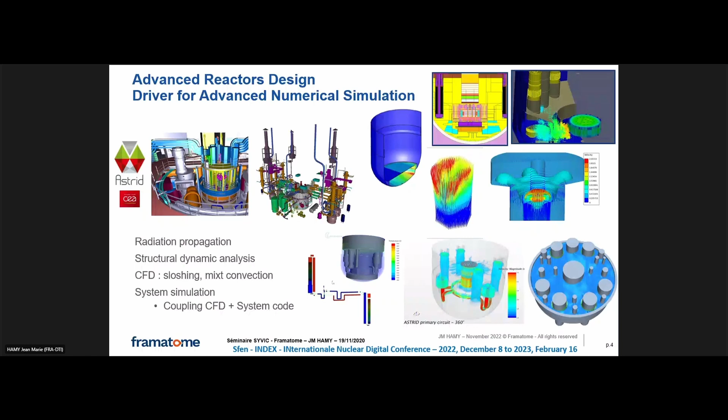So after Astrid, we developed many tools and new practices. At the end of the project, we decided to keep the momentum and create a design school to help much more globally within the company, the various projects, to address the stakes of complexity mastering we have when designing our complex systems and reactors, to also help for knowledge transfer and development of architect engineers, and also to cope with the efficiency of design sequences, and with the question of early prototyping and larger usage of advanced methods.

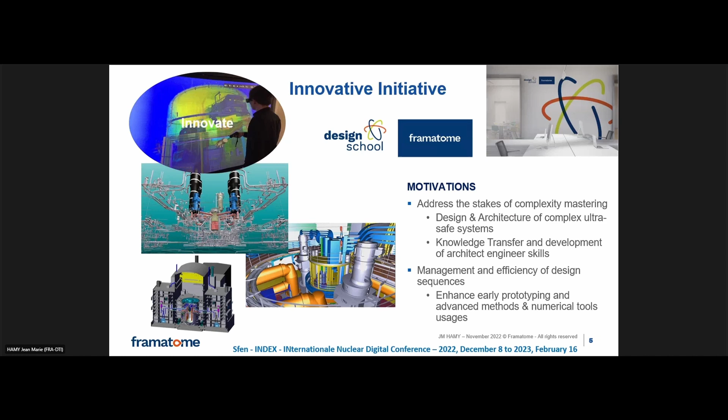So we created this design school to capitalize new practices, new engineering tools, and our main focus is to reduce the engineering sequences, to accelerate the prototyping - digital prototyping, but not only, also through physical mockups or through simulators. So in terms of new engineering practices, you can see agile design phase.

We managed that for hardware systems. It was quite new compared to what is done in software development. Also, as a manufacturer, we take benefit from design to manufacturing experience. And of course, we have to deal with designing new systems, design exploration, optimization, architecture selection, trade-off management, and decision making. So we use digital tools for that.

You see, for early prototyping, physical prototyping, we take benefit from Fab Lab, and also our virtual prototyping. You can see here an immersive session in virtual reality to see the configuration of the system within the whole room. And also you can see some colors in various places - they are connected to the radioactive doses you can face when moving in the different rooms.

So it's a very original development we manage within Framatome. And also in terms of simulation, of course, we use strong advanced digital simulation, and to reduce the computational time we use learning methods and also digital twins, etc. So this design school is focused on giving a learning session internally, and also to manage a learning-by-doing phase, sort of mini projects, to be much more into getting practical experience of these new tools.

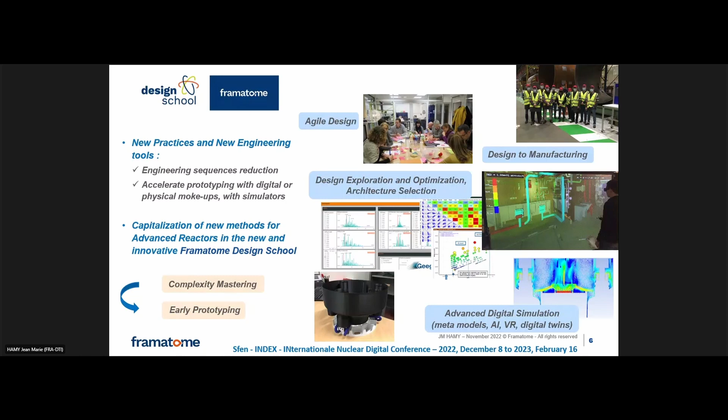So in parallel, we can also rely on a very innovative infrastructure, the SPOT. It's a unique dedicated collaborative space gathering labs for brainstorming and creativity, for rapid prototyping, prototype and virtual reality immersive experience. So we have the Creative Lab for innovation, the Meet Lab for sharing and events, the Fab Lab for physical prototyping, and the CDRL lab for virtual reality.

And in our new premises in the south of Lyon, we have a dedicated space of 400 square meters gathering all those labs, and it's a very unique tool, and we can rely on that to have also new engineering and new collaborative practices.

So in addition, we take benefit from open innovation initiatives, especially to capture digital solutions from startups or innovative companies outside Framatome. I will underline a few experiences: one dealing with concurrent engineering coming from Geeglee methods and tools, the very innovative neural network generation by Adagos, also fully compatible with nonlinear physics.

That is very new. Just a few words about Elvis, prototyping for simulation and I&C of complex systems, but my colleagues just after will go much more in detail on that. And also Ask for the Moon is a startup that helps us implement digital tools to help access all the knowledge, and also to help for knowledge transfer through community within the company.

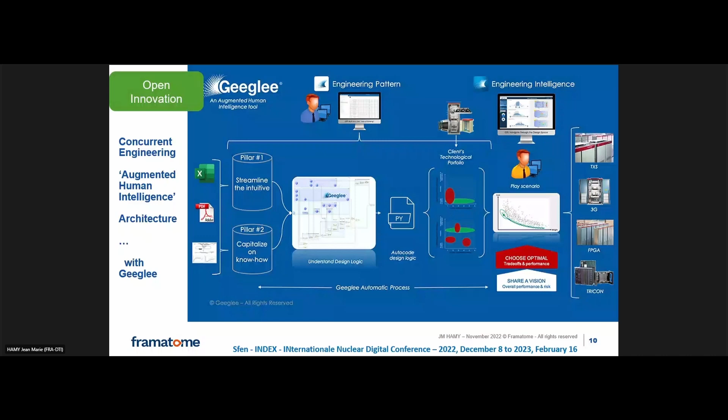Just an example coming from Astrid, we use the Geeglee tool to select and confirm the choice of the safeguard system of Astrid. So we implement all the data, the design rules, etc., the criteria, and we explore the diverse solutions to confirm at the end the robustness of the choice we have performed.

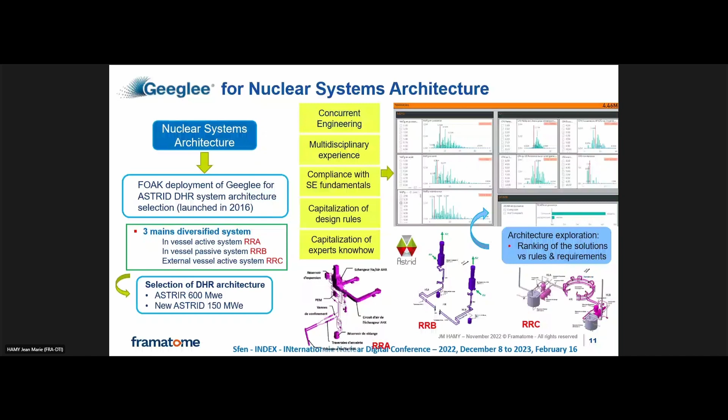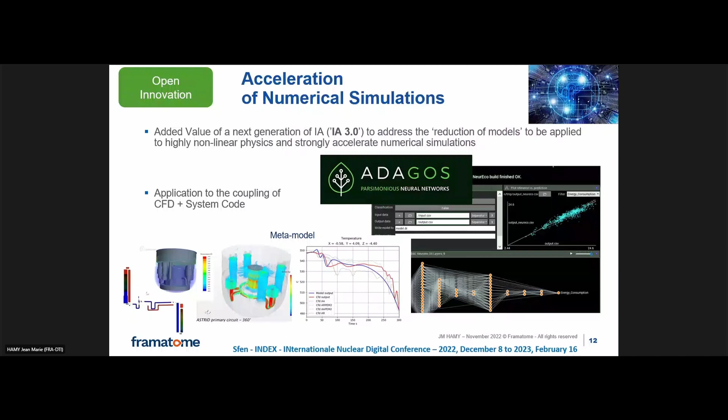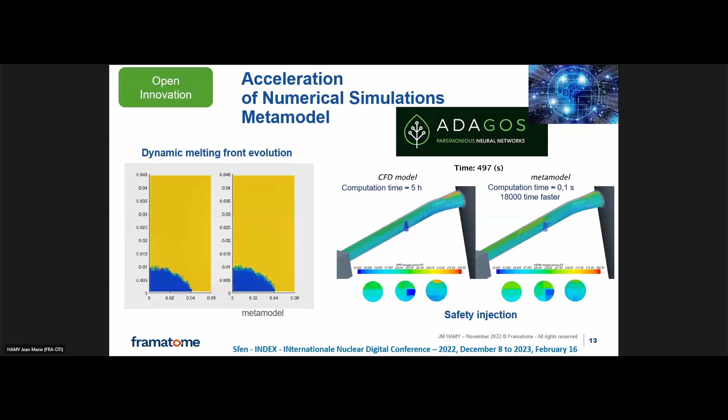ELVIS stands for Early Launch of Validation via Evolving engineering Simulator. The point is to integrate at an early design stage the preliminary definition of the system, and to test globally the behavior and simulate the control of those systems. I'll skip further details since my colleagues will cover that after. So you see that we have tools to accelerate early stage design of complex systems. That's the main goal we have.

Last point, on Ask for the Moon. Ask for the Moon addresses the basis for the tool called Ask Framatome. It's a way to accelerate the connection between people, to ask questions and get answers from expert communities. So it's very innovative.

To take the Chris Anderson message: in the 19th century, the added value of a company rested on its production tool. For the 20th century, it relied on its customers. And for this century, it is based on the ability to bring together and animate an ecosystem.

With this basis, we decided within Framatome to take a new initiative to animate the emergent ecosystem. We have an emergent ecosystem within the nuclear sector with new actors, startups, etc. So we opened our design school and created around it a design school hub, to accelerate connections with new actors, to partner with education, startups and other stakeholders, and in parallel to reinforce nuclear's future attractiveness for the new generation of talents, because we globally need to recruit a lot of people. So you see we are really connected to education institutes, startups, and providers of innovative solutions. That's our new proposal to animate the emergent ecosystem through the hub, based on our design school and the spots and labs. Thank you for your attention.

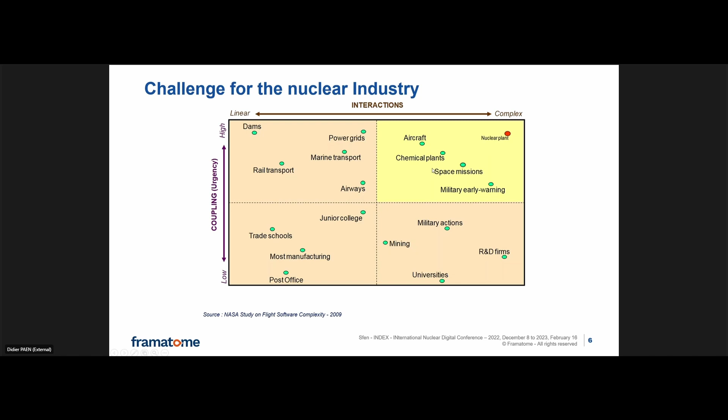And the systems are complex, so we have to develop large and complex I&C sequences. We can make a comparison with what is done for software development, and imagine that we are facing the same kind of issue.

The first issue is that we are sure we have some defect, some error in the I&C sequence we are developing. The other conclusion is that the later we are able to fix an error, the higher the cost will be. So we need to identify a new method, provide new tools to test earlier, with a representative environment, in order to shape the curves and act early during the design cycle of the I&C sequence, to be reactive to any error when it is produced and fix it as soon as possible.

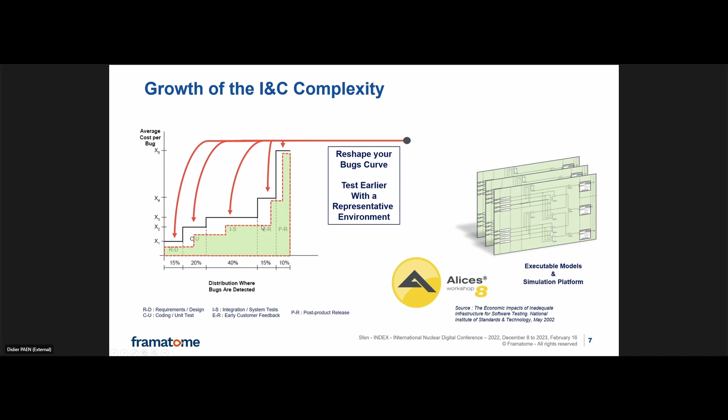So then I will continue. Didier said that the problem and issue is complexity. Here is an example. What is instrumentation and control? For some people, it's just some computers in a cabinet that you don't see.

The problem is, when we talk about I&C, we are dealing with the human-machine interface for the operator—let's say 500 displays that the operator will use. It has to be coordinated with the operational I&C, which is almost 15,000 pages of diagrams. Safety I&C, dealing with the protection of the reactor, has 5,000 pages of diagrams. And everything must be consistent with the operator procedures, which are almost 20,000 pages.

So you can imagine, when you develop a system, you have specifications which are more or less mature, and it's quite difficult to see if they've been tested or not. The problem is the people who operate the plant are different from the people who design the system. So sometimes the designer wants to make something very good for the operator, but the operator says this is not what I need. Everything will be tested during the test bay.

The problem is how big and complex the systems are—it's quite difficult to get every component at the same place at the same time with a good configuration. So mainly it will be done on the test bay or postponed to site. And for each plant, you have a full-scope simulator where the operator will be trained. So sometimes you discover engineering mistakes during the preparation of the training tool, which is not the idea.

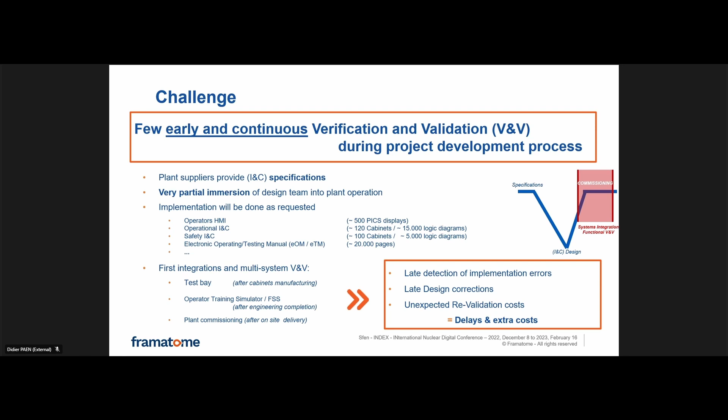Next slide. So we have sketched a strategy based on what's named ELVEES, as Jean-Pierre said—this is the Early Launch of Validation. We want to use simulation, a simulator, many simulations put together. The purpose is to test the engineering data, to see if what we have designed, what we have done on paper, will work at the end.

And of course this simulator must be evolving, because it's good to want to start at the beginning of the project, but the problem is that at the beginning you don't have all the data. So one example is this stepwise strategy, where we said okay, we should start with something that puts people talking together—very important after the COVID phase.

It's the human-machine interface preparation, to see how the system will interact with the operator, which is very complex. Then, once this has been decided and everyone is talking about the same system, you can start the design of the system. You can take what has been drafted on paper, build it in the simulator, and see if it's consistent with the human-machine interface—so now we're working in open loop.

Then step three is where we add process models to have dynamic behavior. This is the part where we do functional testing, where we discover a lot of problems that cannot be seen on paper. Later, with this kind of simulator, you can prepare the commissioning, try to validate your commissioning procedure, and then the step to a full-scope simulator is easier. To do that, we are using the technology of CORYS. Next slide.

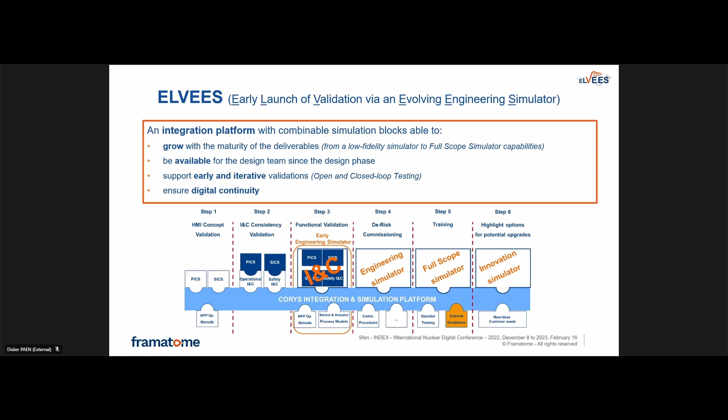So here has been shown, with this simulation, what we want to do is to have some blocks that we can combine, and this allows some engineering practices. If you want to make human-machine mock-up, for example, test different operator views, make human factor engineering analysis, test the consistency between your procedure and your system as implemented, or functional view. This is what we want to do all along the V cycle, the development cycle of the system.

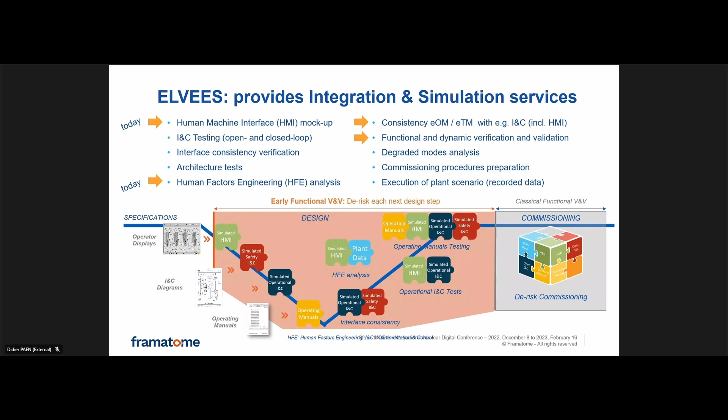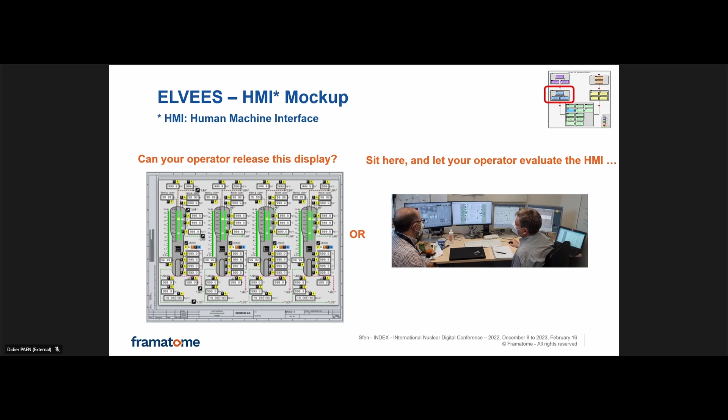So here's an example how we can do a human-machine interface development. Everything is designed on paper, and then we were asking the operator if it's okay or not. You can imagine how difficult it is to evaluate if a human-machine interface is correct on paper. So now we have the possibility to put that in the simulator, to ask colleague operators to play with the system. At the beginning, you just play to say yes, this is what I want, or there is too much digit or too much information, or this is too complex to access this display. This is the kind of thing we can address from the beginning.

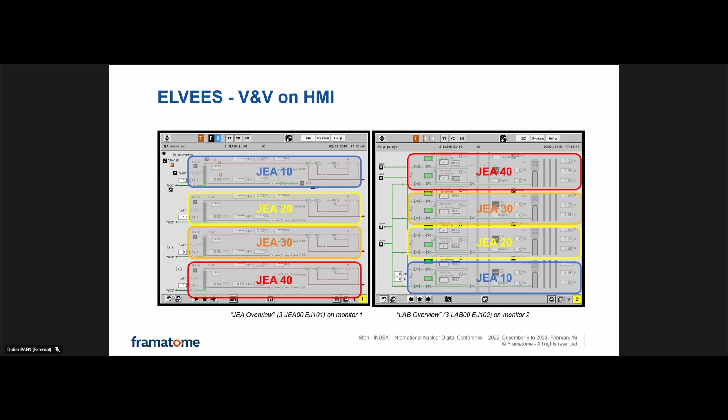So we are working also on specification, because doing some specification on paper is quite complex. What we are able to do with this kind of simulation is translate GRAFCET or idea in the simulator, take the system P&ID, the system as it would be designed, and try to see if the I&C specification is working as expected. So here we worked on an isotope production system, and then we developed a new mindset, which was a simulation-based design.

So it was during the COVID crisis with Canadian people, so it was very good. It's difficult to explain some problem by phone, by Skype. It's difficult to say when the valve is opening, then the other will close, and it's not possible. So we were making some videos, we were able to change the simulator, send an update, and then at the end, the customer was very happy.

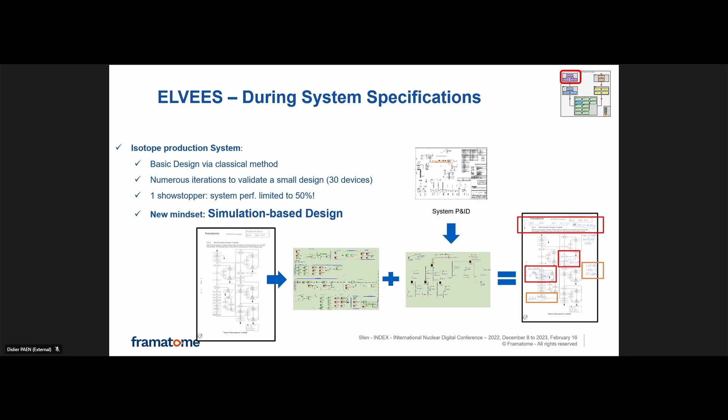And then last but not least is when we are doing functional verification. So when you have the human-machine interface, when you have the operational I&C, the safety I&C in your simulator, and when you have added your process model, so here it was on the emergency diesel generator, then you can make some tests, and here you have the return of investment, because it's difficult to convince people to spend money at the beginning of the project to avoid mistakes that they will identify later. And when I say later in the nuclear industry, it could be 5, 10 years later. So here we have a return of investment on this diesel.

We found that we had identified that 1/3 of the mistakes were due to specification and 2/3 were due to implementation. And we evaluate that when you spend 1 hour at the beginning of the project, then you save at least 6 hours on site. And I say just at least. On the nuclear power plant, it's very complex to make changes, so this is just at least.

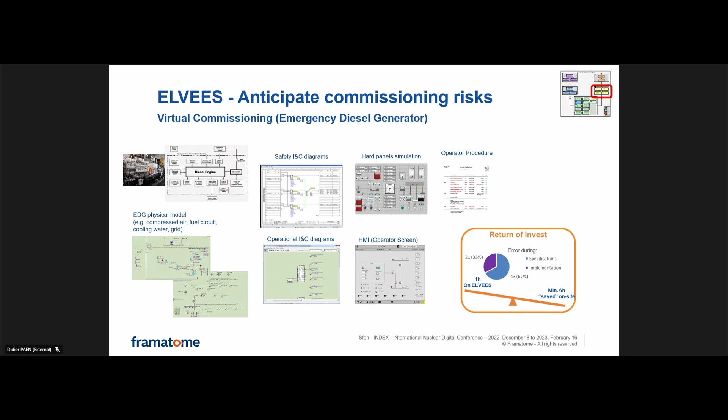So, Didier, back to you. Oh, I'm sorry, take over just.

So there is no big or small project, it's not too expensive, and yes, we want to master the challenge of I&C integration.

Okay, so back to the tool, as explained by Guillaume. We have 2 minutes left, so I will be short.

Access of data is very important, and this is why we promote the use of tools, what we call MBSE tools, so model-based for system engineering. And the idea is to provide tools that will be able to aggregate all the data when you are drawing your I&C sequence.

The tool will also perform the traceability, between requirements, between allocation to units or the version management. But also we are adding some business implementation inside the tool to implement the engineering process. As an example, for Framatome, the way the redundancy and duplication are applied to the sequences, to the different parts of the I&C sequences.

In terms of tools, as you know, the current tools for I&C sequence are more drawing tools, mainly based on Microsoft Visio. Now what we provide are tools that are able to draw your sequences, but also to simulate them. So we can say that we are able to provide data-centric tools that are able to aggregate the properties of any feature, allocation, and so on.

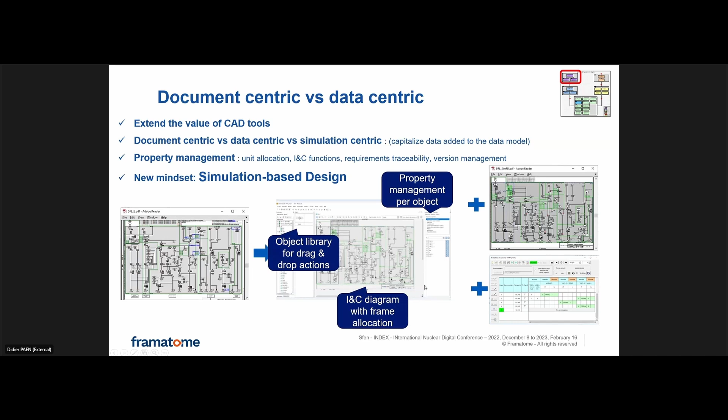And what next? For the future, the idea is to be at a higher level for automation, to be able to generate HMI sequences or process sequences based on the mechanical drawing, as long as we are able to identify some schemes inside the mechanical diagram. So this is the generation of models, and once you recognize the scheme, you are able to generate the model and simulate it in the simulation platform.

So we actually have an R&D project on that subject, and that's all for us. Thank you.

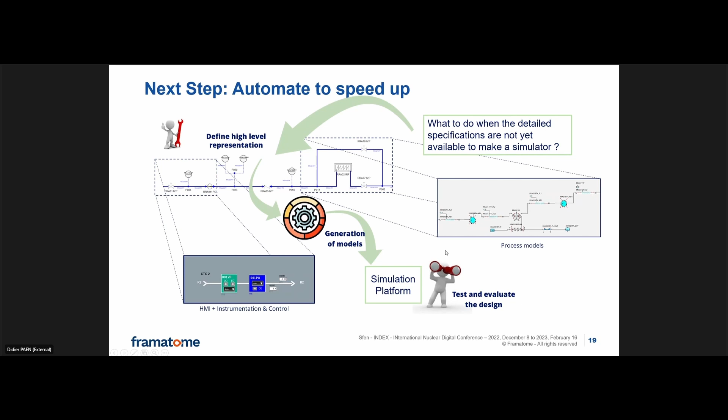So I have a question from my side. How long does it take to adapt the ELVEES tool to a given use case? Is it a matter of days of work, or weeks, or months, or years?

I want to say it depends. The problem in the nuclear industry is that for some small projects, if you already support the technology, the system, it's a question of days. But if you are coming with a new technology and with a large DCS project, then it's more a question of months, since you first have to adapt the tool. Sometimes it's just the naming convention—you have the EDF ECS coding system, but you also have some German ones—so then it's more a question of that.

Yes, and I will also add that we expect it will be more and more efficient, because some years ago, specifications went through Visio, so converting or translating a Visio scheme to a model was not easy to perform. Now tools are more adapted to model transition. And for ELVEES, it also depends on whether the tests have to rely on a model—if we need a model to perform the test, it can take time to develop the adapted model for the test of the sequence.

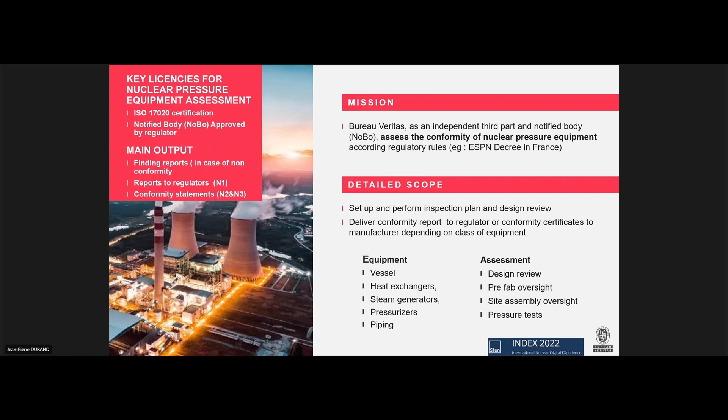What is the capitalized experience from Bureau Veritas in pressure equipment? We have applied and verified compliance for pressure equipment over the last 15 years, with a new regulation in France, but as well for the PED in UK.

So we have thousands of reports and findings, meaning non-conformance or non-compliance on the design, the manufacturing, the assembly, the pressure test, and all the equipment I mentioned earlier. Once we have a finding or non-conformance, it's shown to the manufacturer or the designer, and the designer has to reply, telling in which way he wants to repair or bring additional information that is not known from the notified body that could reach compliance.

So we have a large volume of, I would say, recurrent standard cases. They're quite simple cases, mistyping of something or missing information, but we have as well a significant volume of complex technical cases that took at times a couple of months or even years to reach compliance.

And these cases have involved our best experts from Bureau Veritas, but as well from the regulators and manufacturer. That's a considerable asset for future projects, because we want to learn, we want to progress, all of us in the nuclear domain, and for future projects we don't want to replicate the mistakes we have had in the past. So that's a matter of collective efficiency and credibility.

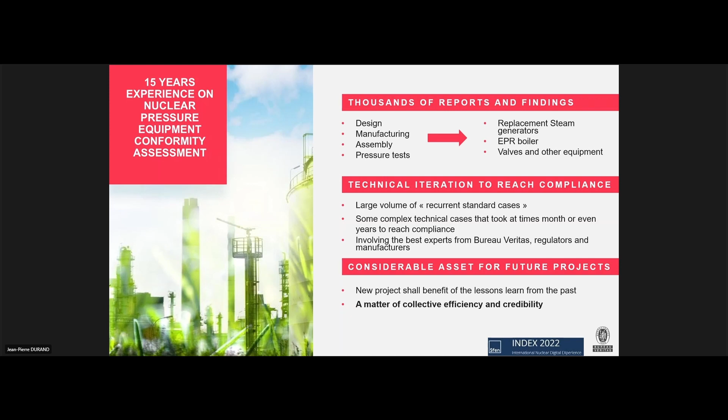The limit of the current tools we have today. The digital transformation of nuclear activity is very recent.

Since 2 years, we have a new platform that Benoit Etave will present later on. This platform is where we post all our findings and comments related to design, review, or inspection, and the manufacturer and future operators reply till we reach compliance. That's fully digital, but it's quite recent, only since 2 years.

So before that ESPN digital platform, we hadn't any real digitalization of the data. I will show you an example. We had Excel files, we had Word files, SQL databases, but that's not really native digital information. And we need to value this past experience, this non-fully digitalized information.

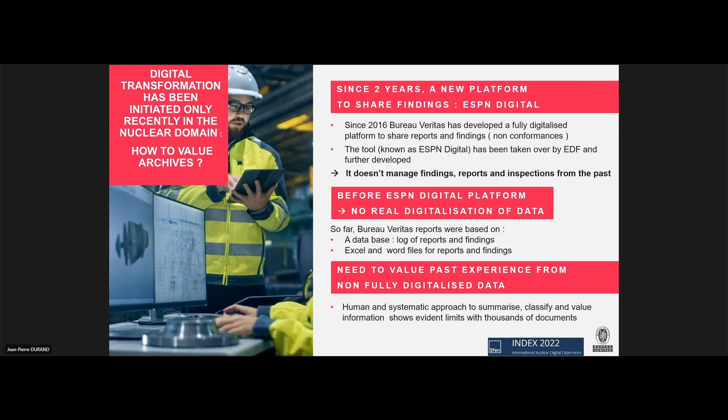And if we want to make a summary of thousands of findings, reports, that's not manageable for the collaborators. And it would take years to get it. And I'm not sure it will be used finally, because it will talk only to specialists.

So just to give you an example, here is an example of the database, SQL database, where we have the log of all our findings, the thousands of findings I told you about a couple of minutes ago. We have some information, metadata about what is the class of the equipment, the type of equipment, the manufacturer, and stuff like this. And we have a long list of findings.

If we click on that, we get a brief description of the original deviation. And if we want to know what was the deviation or the non-conformance, we need to dive into another Excel sheet where we have all the description of the non-conformance and the iteration with the manufacturer till we reach compliance. I remind you that these documents are 10 to 15 years old, or even quite recently we are using these documents.

So making a summary of this manageable for knowledge management is not really easy. So we have considered artificial intelligence support for that.

We have in mind a 3-step development of artificial intelligence to support inspectors in similar cases in the future, to get the best of our database from the past. So first, we will extract the data from existing documents I showed you.

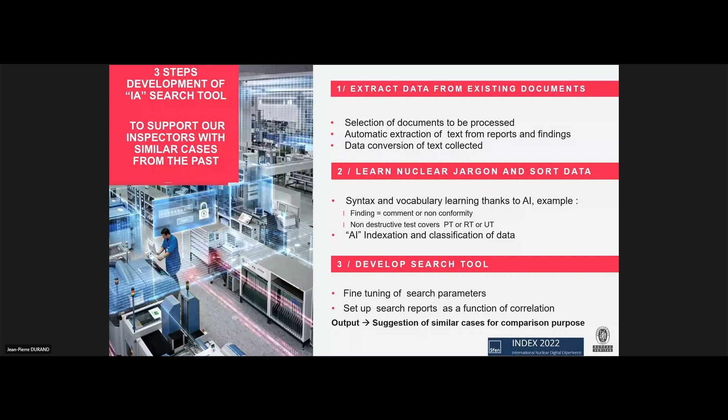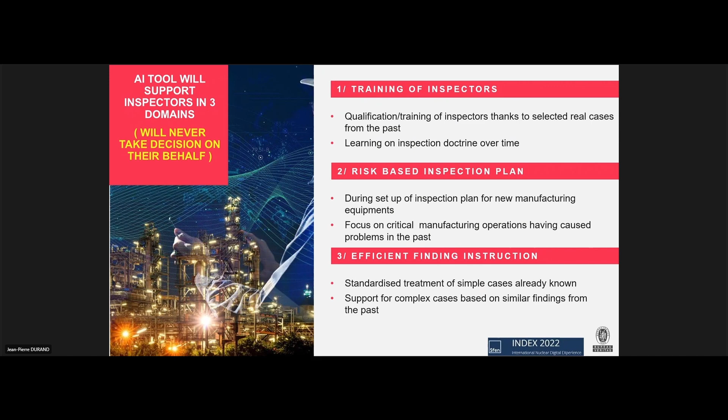Thank you for your attention.

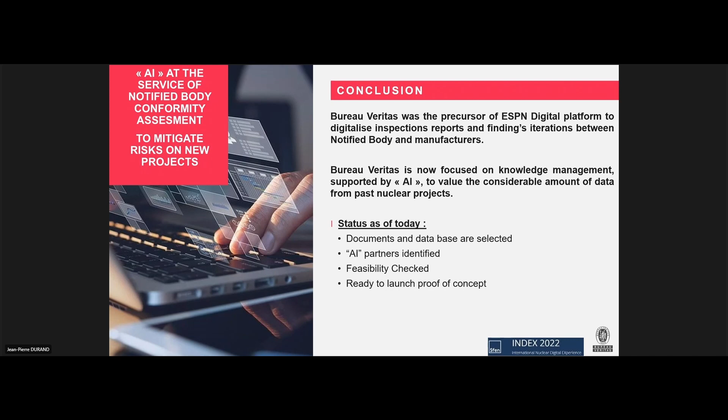Thank you very much for your very clear and attractive presentation.

You have just said that you are ready to launch a proof of concept. When is it planned? We are very impatient, very anxious to see that. I think it will launch in the first quarter of this year.

Oh, okay, so very rapidly now. And so in this proof of concept, will it be applied on current manufacturing and current inspection, or?

That's not the plan today, but I think that Benoit can answer it on the ESPN tool, because this tool will gather a massive amount of information, and I think that the statistics tools will be put behind that, and with artificial intelligence to highlight the main risks for the project, but that's another story.

And do the people who are currently digging into the past history and the past files, do they expect a lot from the artificial intelligence doing the job for them?

Yeah, that's a good question, because we have a young generation coming, and they are much more used to type on this kind of tool, like a Google search tool, than diving in archives from the others with Excel files, Word files, and stuff like this. So we expect a lot from that, because that will be easier access.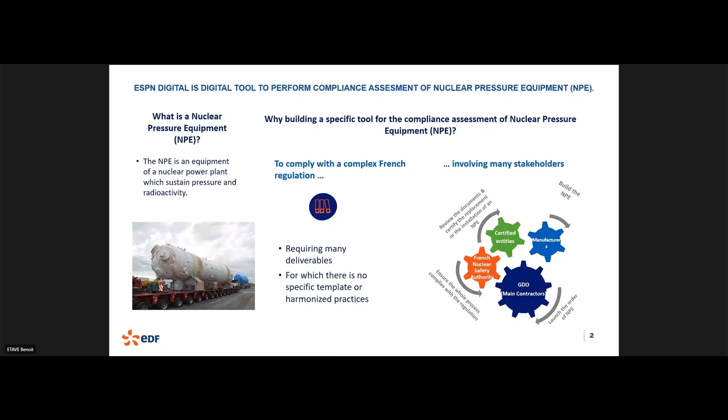ESPN Digital was created, like Jean-Pierre said, to harmonize NPE compliance assessment. In 2015, several compliance assessment errors led to important delays and overspending on EDF projects. This incident could be explained by several factors: first, long and unpredictable compliance assessment duration; secondly, heterogeneous practices and semantics between the different actors; and finally, challenges to monitor NPE compliance assessment.

So between 2015 and 2018, AFCEN led a program to establish a target technical reference approved by certified entities and the French Nuclear Safety Authority. Since 2018, EDF has been developing ESPN Digital with 15 partners like Bureau Veritas, from the French nuclear industry, including manufacturers, notified bodies, and nuclear associations representing these manufacturers or notified bodies.

At the end of the project, ESPN Digital is expected to first reduce compliance assessment cost by 20%, optimize resources and enable better planning and management, reinforce the quality and safety of NPE through standardization of practice and end-to-end traceability. I will give you some examples, and finally cover all assessment actions within a single platform.

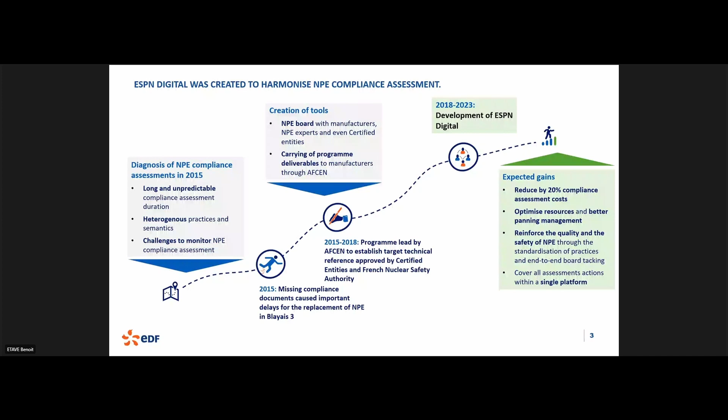ESPN Digital was developed through the program Switch. This digital transformation program aims at supporting the EDF nuclear engineering unit in making the most of new technology and practices. It's carried out by 3 partners: first EDF, and Capgemini and Dassault Systèmes, who help them develop this new technology.

The program has 4 pillars: first, set up system engineering across the project lifecycle; second, pass from a document-centric to a data-centric approach; third, standardize and digitalize engineering processes; and at last, work with external companies to gain competitivity and facilitate exchange.

Now, ESPN Digital has 3 main services. ESPN Digital is a digital platform that onboards the whole nuclear industry, based on PLM technology from Dassault Systèmes. This platform centralizes and facilitates exchange thanks to the collaboration chamber, permitting collaboration and a unique vision on certification between all stakeholders. Second, it supports the production and harmonizes deliverables thanks to digitalization of Sfen guides in a data approach. And finally, it proposes a global and consolidated vision for nuclear pressure equipment compliance assessment.

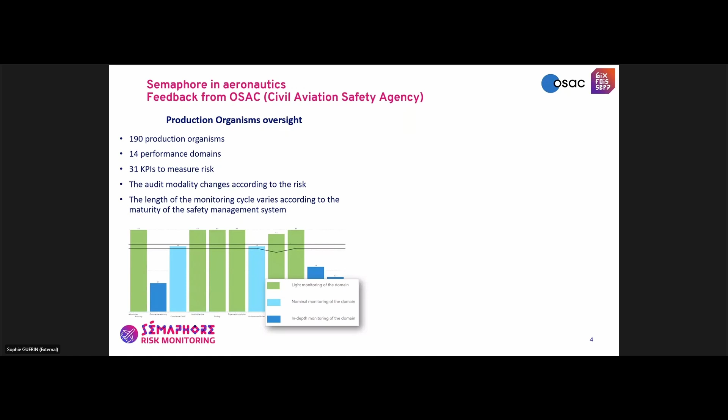Another semaphore tool we've put in place for the Civil Aviation Safety Agency is about aircraft surveillance. Today, there are about 15,000 aircraft registered in France, and OSAC has a mission to inspect a sample of them every year. With the semaphore tool, since 2019, they extract an annual sample of about 400 aircraft.

And this sample is not just a random sample. It is a sample that takes risk into account. So there is a risk score that is computed for any aircraft registered in France, and in the sample, the most risky aircraft will be considered.

The sample will also respect some business constraints, such as being representative of the fleet. The idea is that OSAC doesn't want to inspect only very big and very complex aircraft, but wants to inspect any kind of aircraft, very small ones, very recent ones, and so on.

So the semaphore tool allows OSAC to select the number of aircraft they are going to see this year, and then delivers a sample of aircraft that will be representative and prioritize the most risky ones.

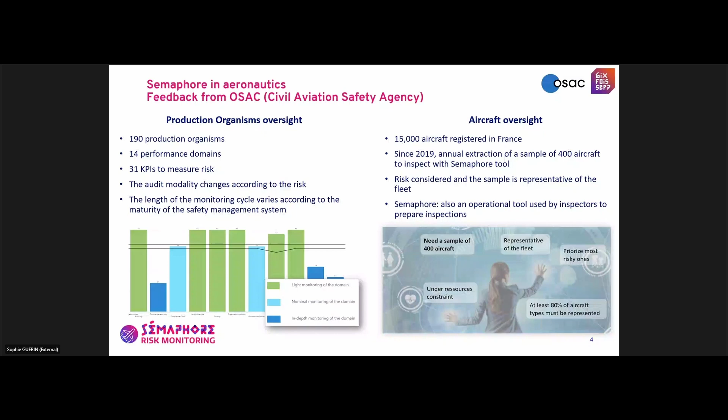So our semaphore monitoring tool, what is it? It is a tool to define and monitor oversight programs based on risk. All KPIs are seen in a dashboard. So mainly, in the end, the tool is a dashboard and a parameter application tool.

What is it for? One of the main problems is that you might need to justify your inspection plan and explain why you have seen this item or this item, and why you haven't seen this other one. With the semaphore risk monitoring tool, as there is absolutely no black box, you can always justify and explain why you have inspected this item or that one.

And it's based on a reason, not just random sampling. It's based on the risk and on some other business constraints. It also has the goal to improve global quality, because the risk we measure is a relative risk, so there is always a continuous quality operation. And on resource optimization, the idea is that if you focus on the most risky items, you optimize your inspection globally.

The key feature of the tool is that it is industrial. Every piece of data is updated every night. It is full web, so it's responsive, and it's an evolving tool. You can always add more data, any kind of data, into the tool.

So a few slides on the methodology. To measure the risk, the first thing is to measure some KPIs. The risk is generally described as the crossing of the probability of occurrence of an incident and the severity of the consequences of this incident. And so you have to define and measure a set of KPIs to compute this probability and severity axes.

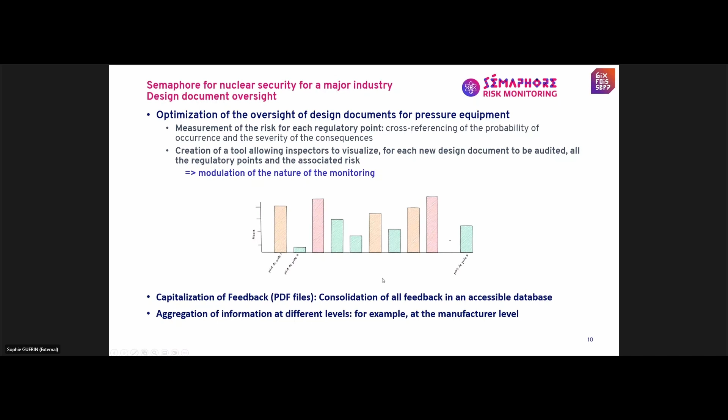And what I'm going to show you here is a demonstrator we've created for last year's World Nuclear event. Here the story is all anonymized, and we are creating an inspection plan for all operations, for all production operations of a nuclear power plant.

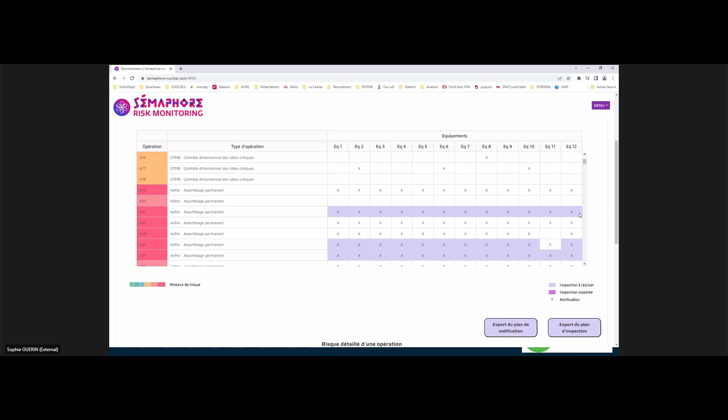Everything is transparent, there is no black box. So if I click on operation A19, I can always go down and see why it is risky. It has a risk of 5, mainly because there were many findings in the past and complementary demands, and there is an event on the ASN website related to this kind of operation. So all of this increases the risk. It's completely transparent and allows any inspector to see why this operation is risky or not.

And what I would like to show you, just before my time is off, is how to modify the inspection plan.

Several things can happen over time. The ASN can change the sampling rule and say, now for thermal treatments for instance, you have to see at least one operation by treatment means. So you can check the box and update the inspection plan, and it will be updating. Here it's calculating, as you see. And you have your inspection plan, and you are going to see some new operations appear here in deep blue. These are the new operations in deep blue, and the operations that have been removed are in gray.

Another thing that can happen is that over time, for a certain type of operations, there can be more and more findings. If this happens, there will be an alert on the dashboard saying, on this type of operation there are many findings, so there is a suggestion that you might want to see these operations. For instance, I might want to see operation A19, so I check the box and safeguard, and I'm going to see the A19 operation.

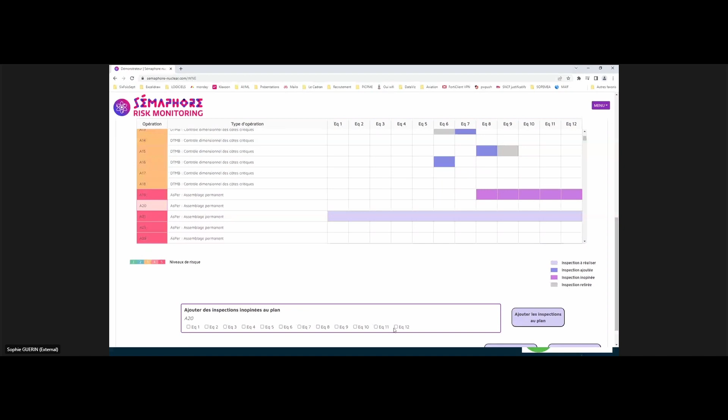Here you see there are some new equipments I'm going to see, and I'm going to see them on an unexpected visit. The last thing I can do is, for instance, say on operation A20, I want to see equipment 12 because I have some other information that has come in and is not parametered in the tool. So I'm going to check equipment 12 of the A20 operation and add it to this inspection plan.

See, the square is now purple for an unexpected inspection. And in the end, you just have to validate the inspection plan, and it will be your new inspection plan.

So this was the demonstration of our tool. I think I'm just right on time, so if you have any questions, don't hesitate.

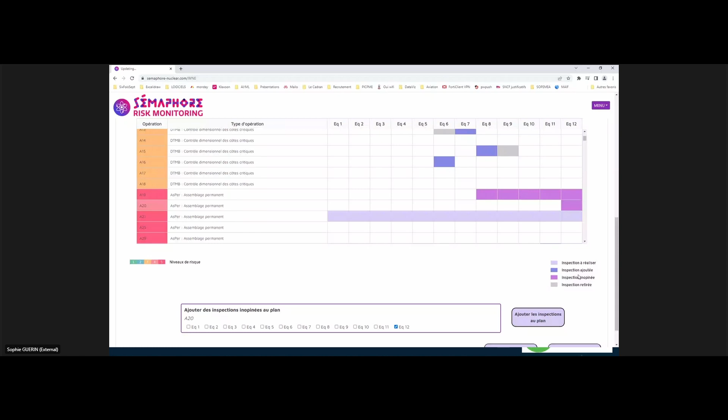So we have a question: how independent is it from ESPN Digital? Is there any potential for common cause failure? So far it is independent, because we can have any kind of data source in Semaphore. It doesn't have to be connected with ESPN Digital, but it can be, of course, connected with ESPN Digital.

About aeronautics plants and aircraft, are the inspection priorities produced by Semaphore significantly different from those given by a professional? Is that different in the nuclear industry than in aeronautics? Maybe Bertrand, you can detail, because you want to compare what is done in aeronautics and in nuclear with Semaphore. It's rather in aeronautics there is quite an experience, if I understand. So basically, the inspection plans and priorities produced by Semaphore, are they very different from the ones that would naturally be proposed by a professional or an expert?